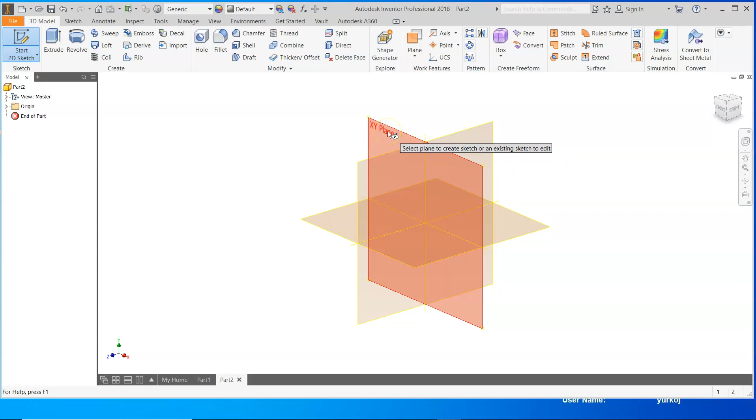We're going to click Start 2D Sketch. That'll bring out our work plane choices. I'm going to create mine on the XY plane. When you do this, now we can see the Y, X, or XY coordinates.

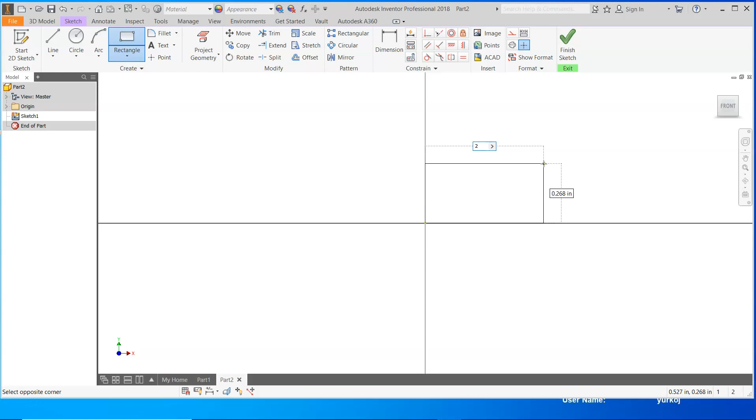This is 0, 0. I'm going to draw a rectangle, starting at 0, 0. And then while we're dragging, you can see that the dimension boxes are open. I'm going to type in 2 inches for the width. We're going to hit the Tab key. I'm going to type in 0.75 inches for the height and hit the Enter key.

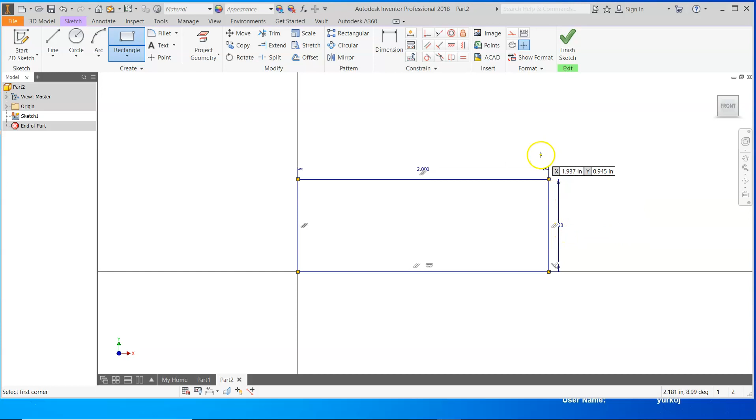On my View cube, I can hit the Front button. And now I have a rectangle that's 2 inches wide, 0.75 inches tall. We're going to add a circle.

And we're going to draw a circle. I can type in the diameter of the circle right now, but if I don't do that, I won't get a dimension. I can add that dimension after the fact, clicking the General Dimension tool, which is up in the middle of our Sketch tab.

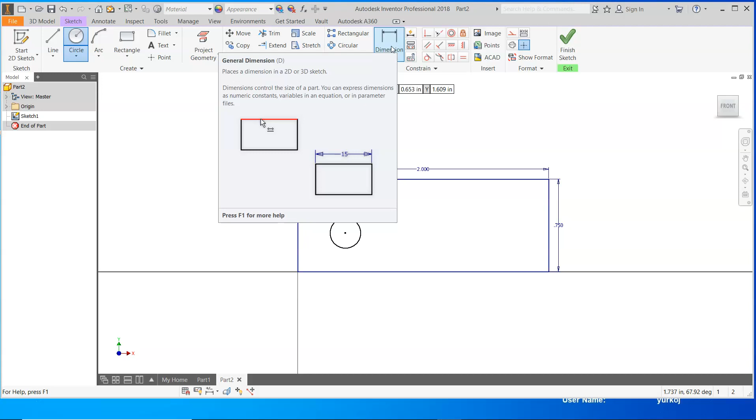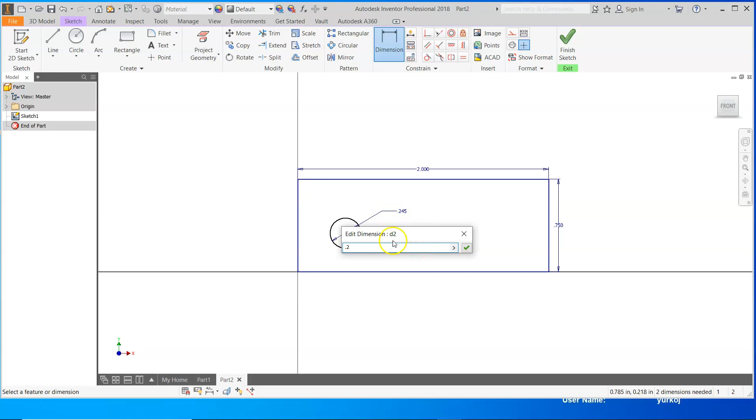And bring my mouse to the edge of the circle. Click on the edge, pull away. Click one more time. My Edit Dimension dialog box pops up. I'd like to make my circle 0.2 of an inch in diameter. Notice it says D2, that's dimension 2, and the measurement you can see is going edge to edge, so that's a diameter.

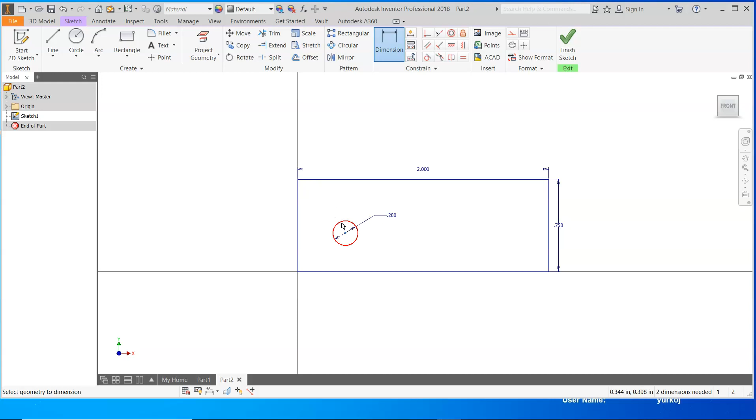This hole is not done yet. You can see that while I have a hole, the hole is not set. I can move it around. So we want to give it a location.

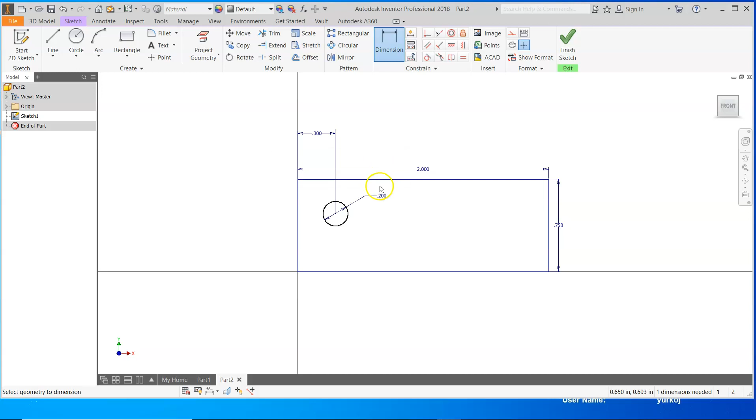I'm going to put it 0.3 of an inch away from the left edge. And we want to center it up and down. So we're going to click on the top line, release, click on the center mark and release, and tap to bring up the Edit Dimension dialog box.

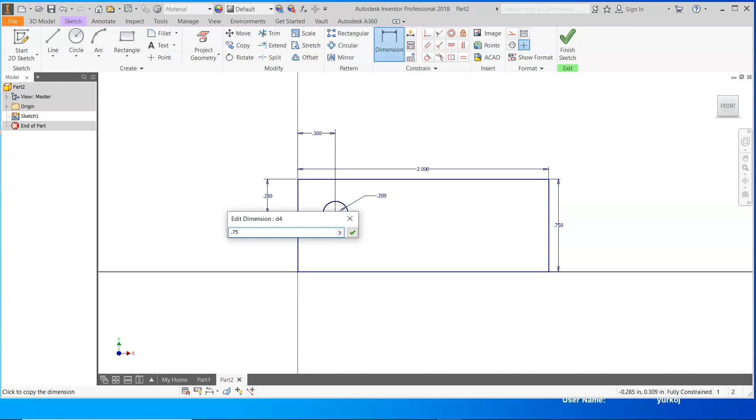The height of our box is 0.75 inches. The dimension we're going to want is going to be half of that, so we can center it. We can recognize that 0.75 is the overall height, and we'll divide that by 2 because that's half. And we now used our Edit Dimension box as a calculator to create the dimension for the height.

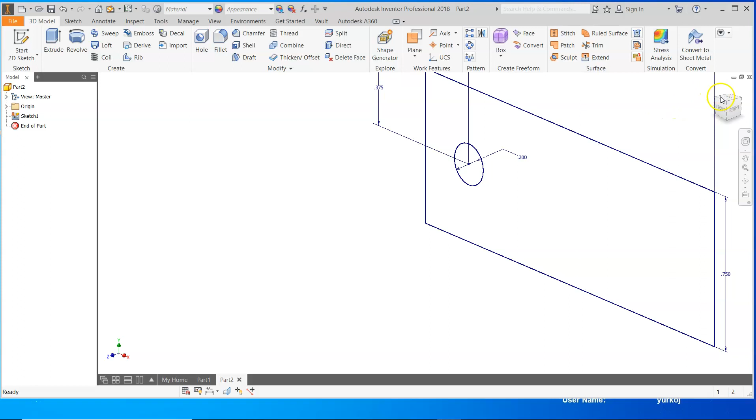We now have the overall dimensions for this object complete. I can get my object back to center by using my View cube. Hit the little house button, zooms all, and brings us back to this isometric view.

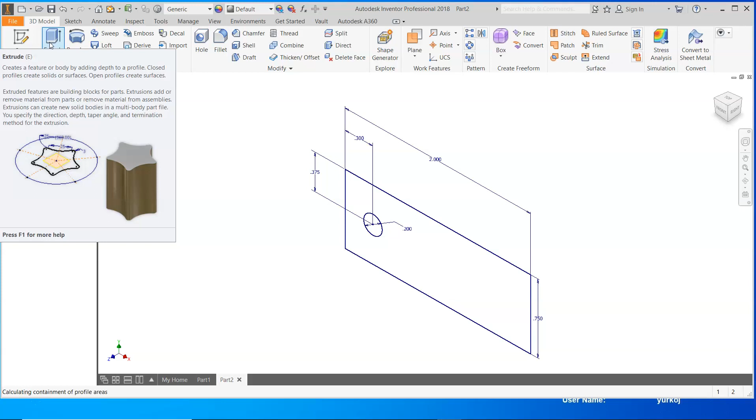We're going to extrude. We can click on the extrude button up on our 3D model pane, or you just hit the E key on the keyboard, which you can see is at the top of the screen here next to the tool name. See in parentheses the letter E. That means that that's a shortcut, so I can hit E and that automatically pops my extrude dialog box up.

Now all I need to do is click the space that I want to extrude, and give it a distance to extrude. In this case, I'm going to extrude 2/10 of an inch. I click OK, and now I have a box.

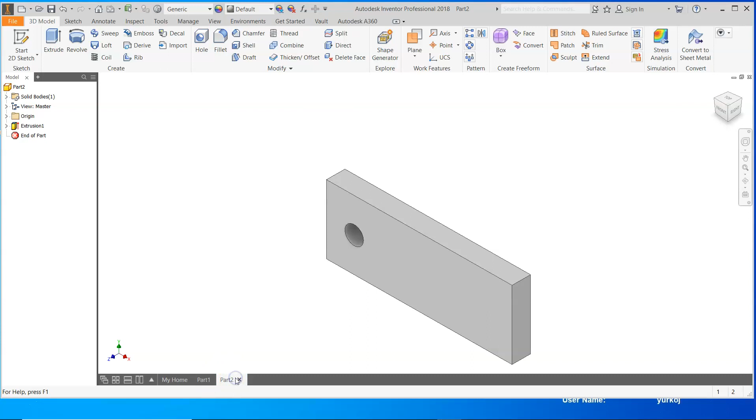But if you recall from our original, there were rounded edges, so we're going to show you how to round those edges. Rounding off the edge of something is called a fillet. Click the fillet button, and then click the edges we want to round over. What's cool is that you can reach through the object to identify objects, features.

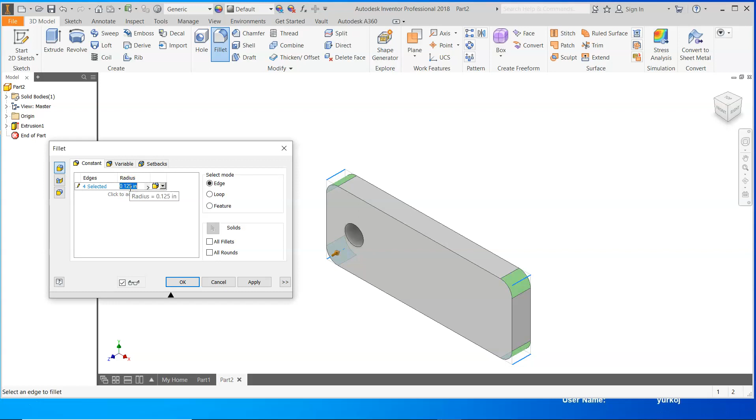And now we want to give it a bigger size. We're going to go 0.25. In the fillet dialog box, you can identify and vary the dimensions.

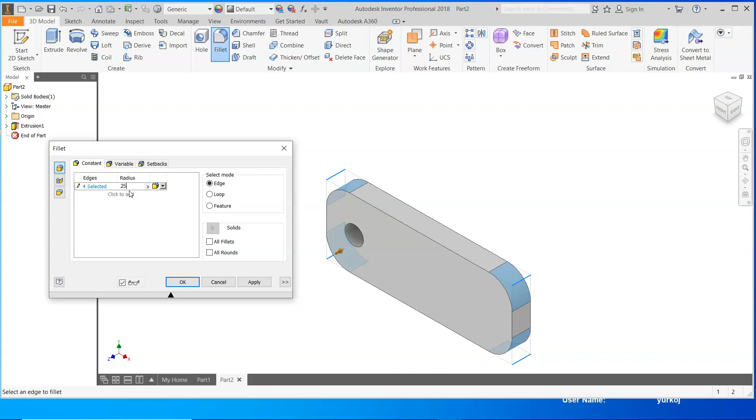Notice that if I use an invalid number, it pops up red. If I give it a valid number, it's black. So 0.25 is what I'm looking for. I click OK, and now we're done. And that's all we need to know to build this part.